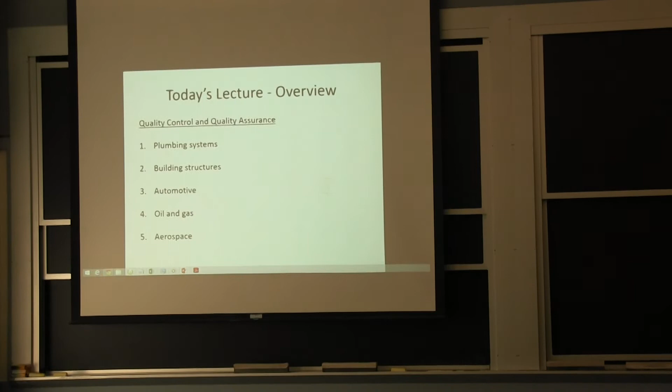So we'll do plumbing systems. We'll also go back to some building structures. We'll talk about roof joists, which may be a good topic this year. We're getting a lot of snow, so we may soon hear in the news that schools have to close because of snow load and those sorts of things, because all buildings are built with a certain number of pounds per square foot, and then when you exceed it, it's mostly dependent on the quality of your welded joints on the joist, whether you're going to be able to sustain additional load.

I have an automotive suspension example that I want to bring up. We'll talk about requirements in oil and gas and aerospace. It's going to be a busy lecture today. Quality control or quality assurance.

One way to think about it, if I say quality control, a lot of times I'm referring to checks that are done during fabrication. If I'm talking about quality assurance, a lot of times are checks that are done after the fabrication. So if you have something critical, say you have something built in China, and you want to make sure when it comes in that it meets all your requirements, you can enforce them to do a good quality control so the assemblies don't get shipped for no good reason. And when they come in, you do a receiving inspection. So you go through it again, essentially a second set of eyes, trying to see if you could find something. It's not in the dictionary, but it's the way that I've been used to think about it.

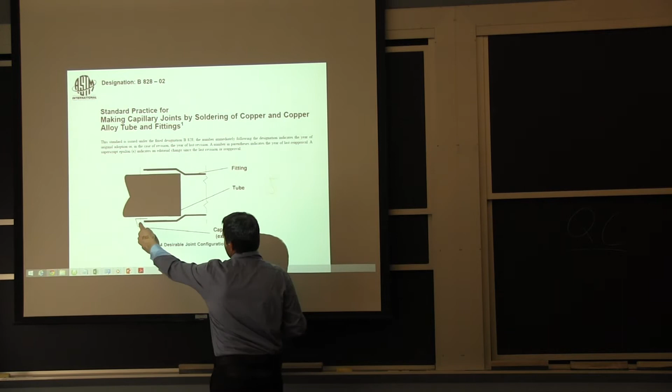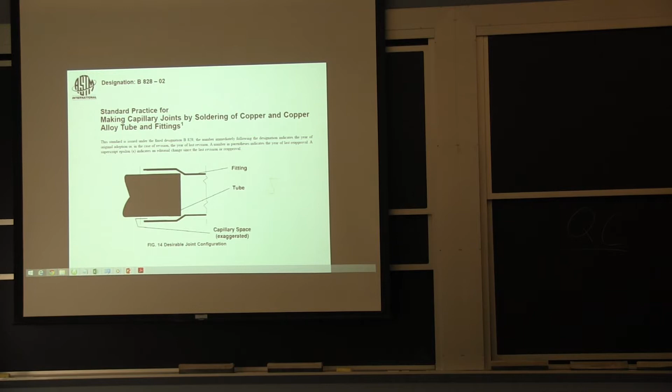When it starts becoming hot enough, that's where you start adding the soldering material, generally a low-fusion tin alloy, and you could use some silver in it. There are a lot of different solders depending on whether you want high strength or an easy job. There's a schematic here showing exactly what I was talking about. So you see the grinding marks from the guy who prepared the pipe. You see the flux flowing a little bit on the back side, and this is hot enough, so they're starting to bring the filler material here.

The joint that I passed around never looks exactly perfect. A lot of times when you see extra solder deposited on the outside, it's not a sign of strength. It's actually a sign that it was potentially a little hard to get the solder to penetrate the joint, and that's why it built up on the outside. So it's not a quality criterion to see a lot of solder on the outside, but if you see a little lip all around, you know that it actually was sucking in.

And sometimes from the other end, if it's just a linear joint, you can see the solder going all the way to the end of the joint. That's always a good way. The other way, if you remember in the first class, I passed around a sample that was peeled, so you can see if you have coverage or not. But that's part of qualification of the plumbing people. So you can have them make some joints so you know that they can do it right consistently.

So if I had the fitting over here on top, just a linear joint. A lot of times I bring the heat from one side and I'll come here with my filler and just try to get it in, and I'm hoping to cover this whole space. Now, we'll get back to that. The way you cover the space in the ASTM, they talk about how to cut it, how to get the burrs out, get the corner of the pipe clean, the fluxing, how you assemble, how you heat, and

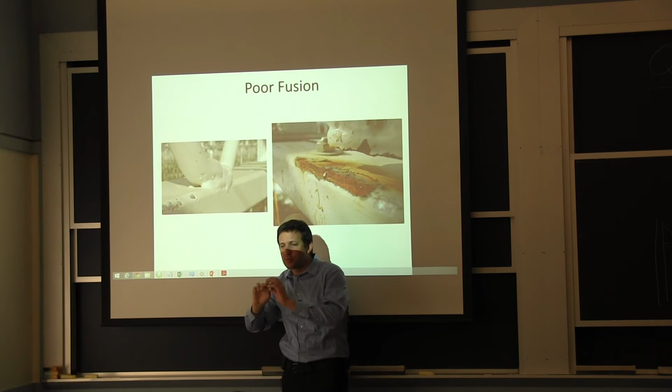Armford has been talking to you about fusion welding and the details of the metallurgy and all of that. I also, if you remember, mentioned different welding processes in the first week of class. I said you can use a stick, you have semi-automated processes. So this was done using semi-automated processes. And as you can see here, well, I don't know if you see it, but I see that it's relatively convex. So it looks like they've thrown metal in that corner. The corner is hard to weld.

So the lower chord is actually an empty tube, just like this. And then I have the solid bar that runs. So we're looking here at the joist going this way. The solid bar runs parallel to it, and then it goes on a diagonal. So what I'm seeing in that image is a big chunk of welded metal. It's a little hard for you to say because it's painted, but if you were in the factory and you see this, this is a no, no, no.

Because what it means is they were trying to go too fast. They were bringing in a lot of filler metal, but not heating the base materials enough. Lack of fusion. And there are a few problems in terms of basic welding requirements. There's one here, they have an overlap. The overlap is defined as, if you look here, this is the toe of the weld. You have excess bead passing beyond the toe of the weld.

So I'm going to draw on the other side what we would want to see. We would want to see something like this. Actually, not even. It's hard to do a good one with this geometry, but we want the weld metal to be fused. If you look at this here, it'll fuse the base metal on that angle and the bar over here. Now, there are some requirements, and I'll mention that in a little bit, about saying to the welder, this is not acceptable. There are multiple ways to say that.

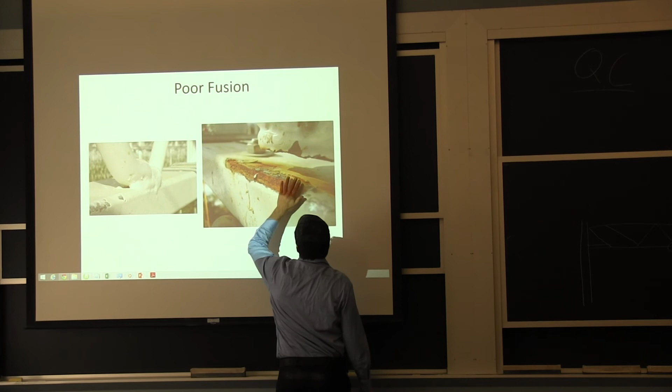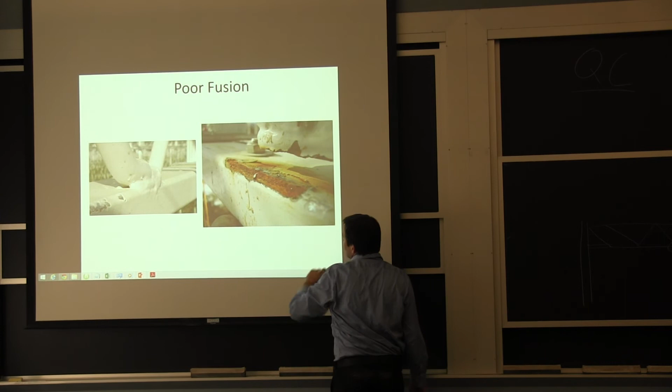So the way we see it after the fact, you see here how the shape is convex. If you look at it here, this piece was at the corner, and you can see there was more material above the surface than where the toe of the weld was. So this is the overlap that I was talking about. And you can see they didn't melt that tube over here. The rectangular tube still has its original shape. You have to take my word for it. It does show a little bit of deepening because this had a galvanizing coating and a lot of paint. The painting job was perfect, but the underlying welding, the structural component, was defective.

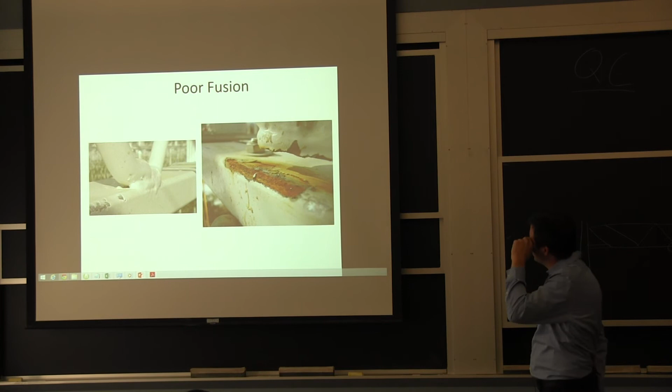Yes? Would you expect them to weld it on both sides to some extent, or is it enough to just weld it on one side? It's a good question. Welding it on one side brings you what the structural engineer calls eccentricity. It makes the joint try to rotate a little bit. So my main comment back to you is, when you do this design, you're assuming that it's a sound weld that can deform a little bit.

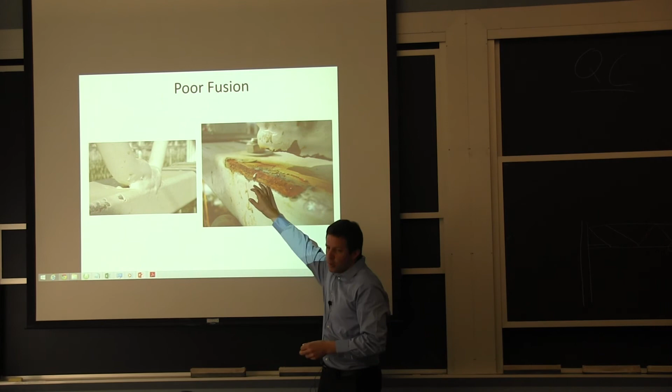As soon as your weld can deform and stretch some amount, it will be able to take the misalignment and essentially carry whatever contact force. But assuming ductility for a detail like this, where you have to throw the filler metal in a bevel in very large volume production, becomes a question whether this is reasonable or not.

So your question was really good, because when came the time to decide what to do with it, because they wanted to continue the production, the very minimum change was to weld on both sides. Just because they had so many issues, and because it was going to be repair welding, it wasn't left as an option. Plus, it turns out they had issues with how much snow they expected to have, and the requirements up in Maine as opposed to the requirements in Holland for how to deal with snow. So things get very, very complicated quickly. So I was very happy to hear that they were going to do two welds.

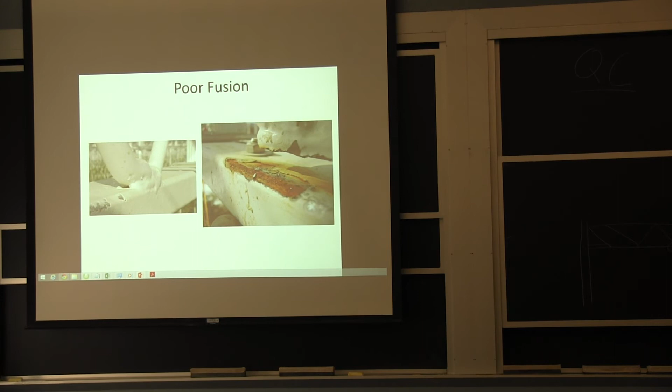And believe it or not, that project turned into enough trouble that the fabricator said, you know what, I'm going to make another batch of welded joists for free, and you're going to get them in 3 weeks. We're working on it. We started yesterday. It still was a cost to the owner to get all the electrical out and shore the crop, because some of the crop was hanging from these joists for reasons that were not acceptable. But in any event, this is a repair joist, so it's welded on both sides.

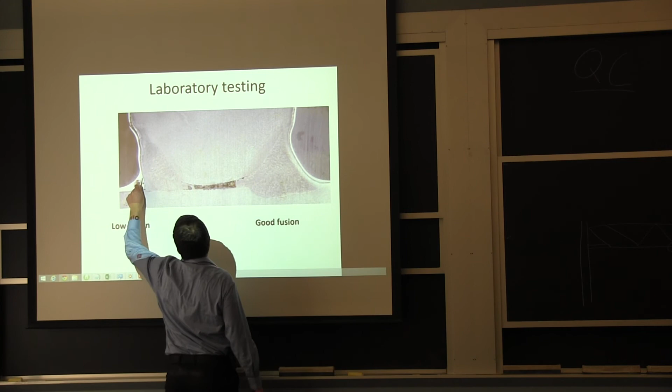And even though the factory worker knew that these were going to be subjected to that quality assurance program, because we were not involved on the first project, but on the second project we were involved to look at those joists when they came in, you still have some joist here that has a little overlap. So if you look at the toe of the weld, this is a little bit beyond, and you can tell because this is etched. So you can tell that the original bar here, the tube thickness, hasn't been melted much. There's a little bit of melting over here, a little bit of fusion.

So what happened is, because the round bar, the solid bar, is much harder to heat, they had a preferential heating of that round bar so much that they didn't melt the thinner section. So you have here on the other side what they should have done.

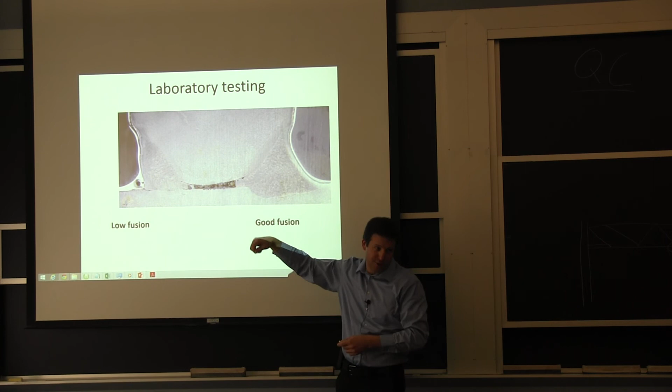Yes? Can you tell us a little bit more about the semi-automated manufacturing process for these things? Okay. So regarding the semi-automated process, you have a filler wire. You have a gun, and I have images in the first presentation, that essentially has the electrode, and you have the wire coming into it. It's a solid metal wire for this particular case, and there's also on the outside a shielding gas. So all they need to do is decide where they're going to strike the arc. You can strike it this way, you can strike it this way. The best way is to try to weave it a little bit. It's very hard in that corner to be striking all the way down, so you have to do it a little bit on one side, a little bit on the other side.

And I was actually there for the qualification of some people that were doing some repair welds on site. And the best guys, that's exactly what they were doing. They're just kind of weaving it a little bit. But the gun itself is again very simple. Shielding gas, solid wire in the middle, and it feeds at a certain speed. So you can control your process. You can adjust the speed, you can adjust the voltage to a certain extent. The manufacturer makes some trade-off for you, so you only get so many options with the semi-automated processes. Okay.

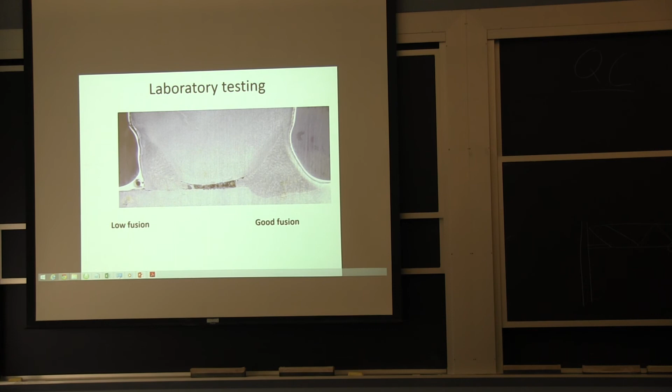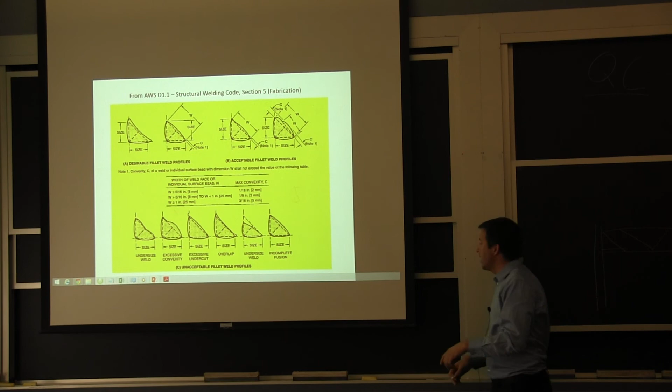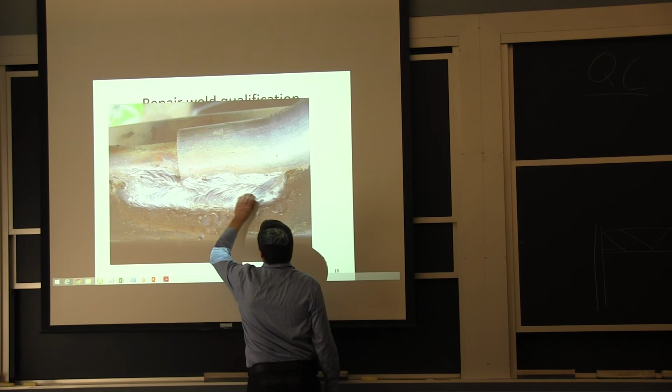So in terms of deciding what's good and not good, I was saying this is not good, this is good. There are some established requirements in the AWS welding code for maximum convexity. You can be concave. This is in the fabrication section, but it's applicable in general. So if you're out there, this is one way to say this is way too convex of a weld, or it's too small. There are some minimum sizes, a lot of limitations that you can look at. So I'll show you a good weld for this, because you can still see a lot of profiling, very small profiling, because the guy was coming on and moving a little bit.

And this was just a stick electrode, so it did have the flux and the big melted pool, and they had to clean it up after the fact. But what they were doing on site was actually the stick electrode, and they had multiple passes. So you can see one pass here that was primarily intended to weld against this, and the final pass welding on the other side. So these were actually going to be very, very strong, but it was just for temporary emergency purposes, because at the end they put on some new stuff.

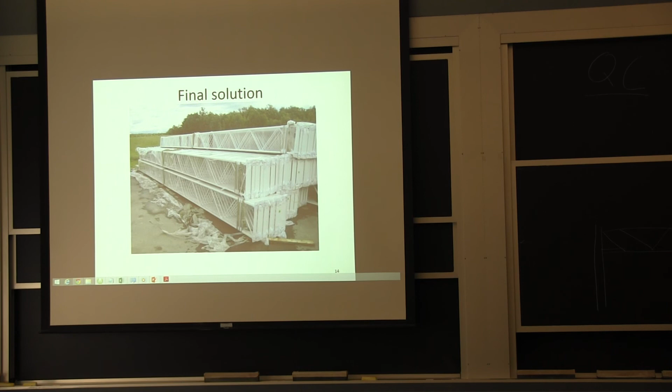I ended up working on maybe 10 to 12 roof collapse projects, and I would say that at least 9 or 10 of them, the issue was the joints. And part of the issue is how people apply the welding requirement. It's written black and white, it needs to be without lack of fusion or well fused, but that by itself is a little general when it comes to what is acceptable and what is not acceptable.

So when I was doing QA inspections, I started to use an ISO standard that was giving me a very specific angle between the base metal and the welded pool for what was acceptable and not acceptable. So 90 degrees was the lowest possible level of quality, and you have close to that on some of the gym equipment. And the reason is it's thin metal and they put big welds. So it's very hard for them to weld all the base metal without putting a lot of excess material. So this is kind of gym equipment. It's still fused because this is thin as opposed to the size of the bead. And it's done very regularly.

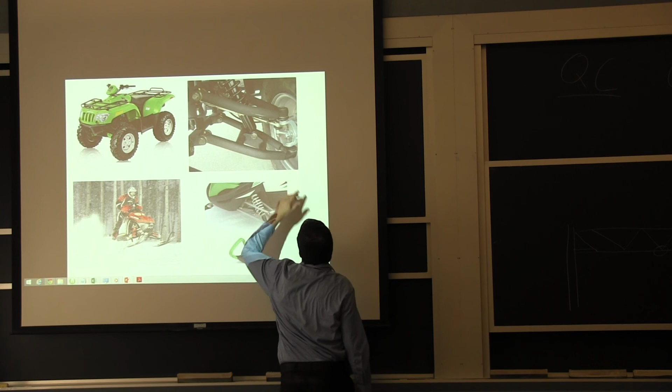Okay, so this is mostly about quality control. I was going to talk a little bit about quality control for automotive, but I actually worked more on these little sport units. So I'm going to focus on that for the next few minutes, specifically on the suspension system here. We call them A-arms because they do have an A shape, 2 long members with a cross member. And if you look at the details here, these A-arms are under tremendous forces. Here you have the whole suspension system lying in the middle of this. Here's the connection to the knuckle and then to the frame.

This component gets beaten up, and it can also hit stones, logs, anything. So in terms of welding it and putting it together, the reason they use welding, again, is cost, but also accuracy and stability. If you take a bunch of tubes and you fusion weld them together on a rig in a very controlled manner, and they do some manually, they do some with robots for efficiency, when it's all done, this is the shape you're getting. There's enough metal at the junction. There won't be a bolt getting loose. There won't be any problem. You can finish it later on.

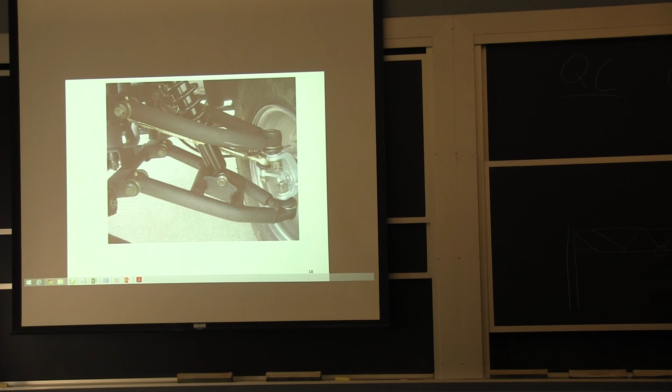So when you look at this component right here, what happened? This went through a process of powder coating and finishing, so it won't start to rust tomorrow. If you start scratching it, eventually it will rust. But as a standalone piece, it's relatively corrosion resistant. And again, it's made precisely. The control arms, if they were to start to move, you lose the stability on your unit. You lose all the...